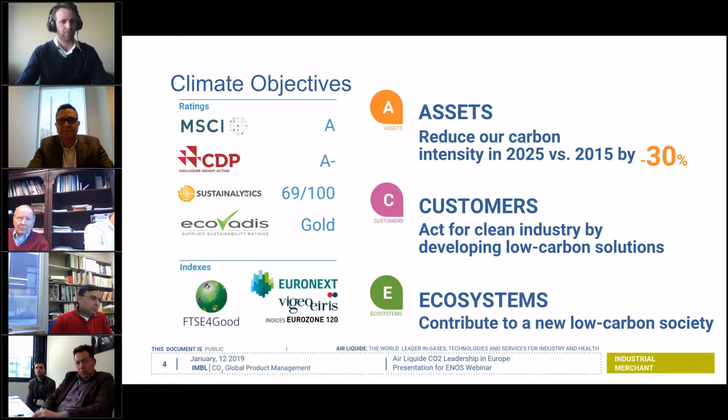One such example is in Port Jérôme in France, where we use our patented Cryocap technology to produce 300 tons of CO2 per day. This is a byproduct which comes from an SMR or a hydrogen plant. And this way we try to decarbonize our own production.

I thought it's very important to touch a little bit on this topic before I start getting into some of the other solutions, because I personally believe that due to change in regulations and policies, in less than 10 years from now, it will be an important topic of interest in a forum like this. Therefore, to stay ahead of laws, regulation and policy makers, and to contribute positively in reducing carbon footprint from our operations, we spend approximately 100 million euro per year to reduce the carbon emissions from our

I don't know how these slides got up and down.

Okay, so if you see, there are a number of emitters of CO2, and there are some high concentration CO2 sources coming from byproducts, and there are some lower concentration. The high concentration CO2 emitters are the ones producing fertilizers, bioethanol, ethanol, or even CO2 wells, where the CO2 concentration is more in the range of 98 to 99%. And then we have other sources like hydrogen SMRs, which have a concentration up to about 40%. The last ones would be the flue gases coming from pulp and paper, coal power plants, IGCC power plants, steel production, and so on. So basically, there are three kinds of sources.

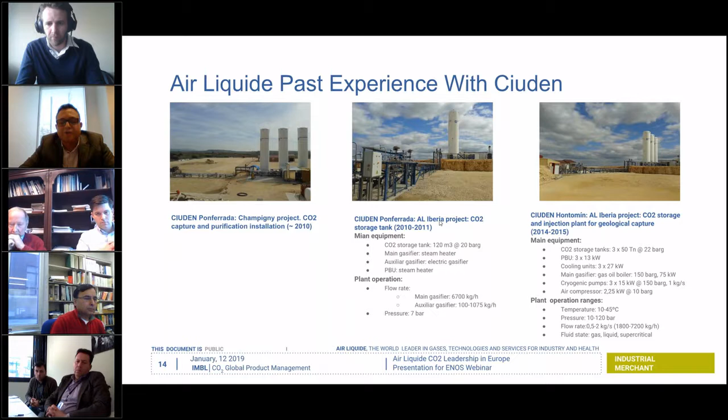And finally, the pipeline was designed to install tracers to detect CO2 flow and connected bottles to other gases for detection of various parameters which were required to monitor the flow, pressure, and temperature remotely. So with this, I come to the end of my presentation.

Okay, thank you, Puneet. I see I have one question from the attendees. If you have other questions, it's a good time to ask. So the question from Vitladik is, do you also use any natural geological CO2 sources?

In the sourcing mix, there is a dependence on natural sources, which is the CO2 which comes from the well, and in the industrial language we call it CO2 coming out from below the earth. Yes, it is there, and if we go back to the presentation and see the sourcing mix, there is about 12% of CO2 which is coming from natural wells. This is for CO2 all across Europe throughout the industry.

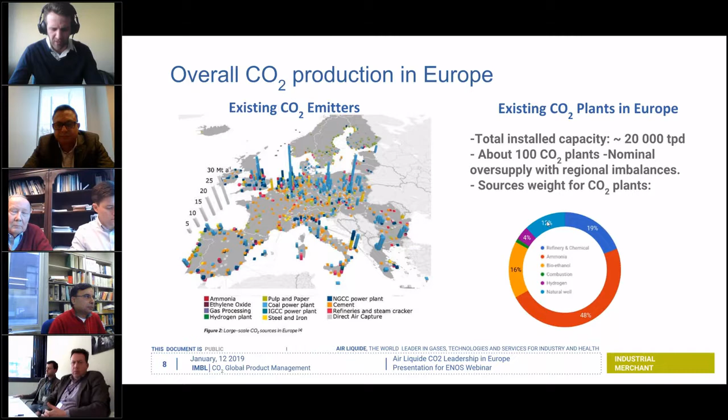Okay, I see. I just wonder, I want to go back to your slide on the cost structure. Just to be clear, you mentioned that the key for supply to CCS projects could be leveraging seasonality impacts. So that means you're kind of recommending that it's better to inject in winter, as I understand.

I mean, this was one of the suggestions I wanted to make: during peak summers, the capacities are always providing the molecule to the customers which need it the most. And if CCS activities can be planned in advance, there could be excess molecule available to inject into the CCS plants or projects.

So if you remember, with Air Liquide itself, we have a production capacity of 1.6 million tons per year, out of which 1 million tons is what is delivered. So the difference of 600,000 tons is basically due to the seasonality impact. And this molecule could be available if the activities are planned a little bit in advance.

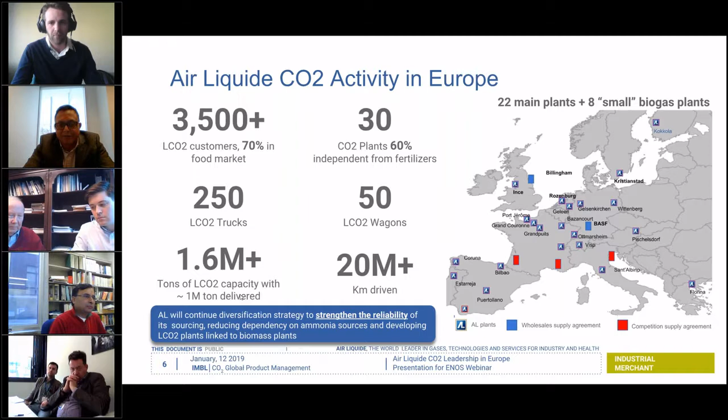Okay, so we have two more questions from the attendees. The first one from Thomas Berly is, what is the price of highly pure CO2, say for food and beverage, in dollar per ton?

I think it's quite relative, and the price throughout Europe would depend on a number of factors. It is basically a microeconomics case most of the times. If you have more supply than demand, the prices are low, and if there is more demand than supply, the prices tend to go up. It's not a hard and fast rule that we can say there is a price. There are other elements contributing to the cost, like the distribution cost. The further away you are from the production plant, the cost is going to increase.

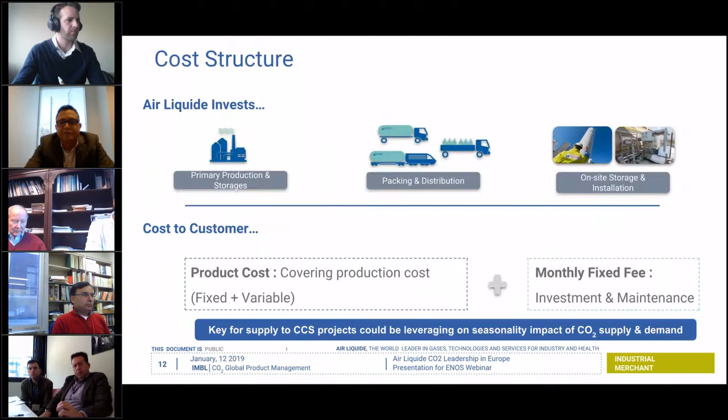Sure, thank you. And the other question from Timur de la Haye is, does Air Liquide supply biogenic CO2? Yes, if you see the set of plants which I showed you and the recent investments we have made. What can be considered biogenic CO2 or bio CO2? Any CO2 coming out of non-chemical activity, for example biomethane or bioethanol, where you use energy crops or corn as a feedstock. They all can be considered a short carbon cycle, where you produce CO2 from anaerobic digestion, basically from agricultural waste most of the times.

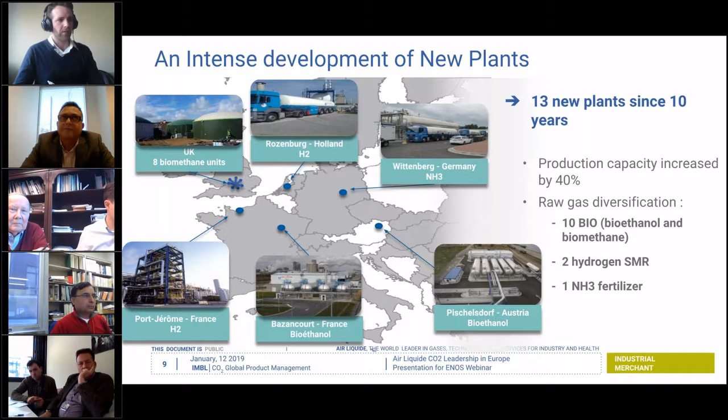Okay, I have a last question before we go to the next speaker. How do you trace the CO2 source to identify the source that may be out of spec? Sorry, can you repeat again? So how do you trace the CO2 source to identify the source that may be out of spec?

So this goes back a little bit upstream, to the raw gas source. Before putting the purification and liquefaction process in place, or during capturing, or even before capturing the CO2, we analyze the source for the kind of contaminations it would have and make sure the process upstream of the byproduct is in place, because this is very important. We need to understand what contaminations would come with the raw gas and what contamination could pass through to the end product.

And as I said, it is important, as the final product is CO2 which gets in close contact with the food we eat and gets dissolved in the products we drink. So it's important to make sure that at the first stage, when we select the raw gas source, it follows the required parameters to bring the final product to food and beverage grade. I hope that answers the question.

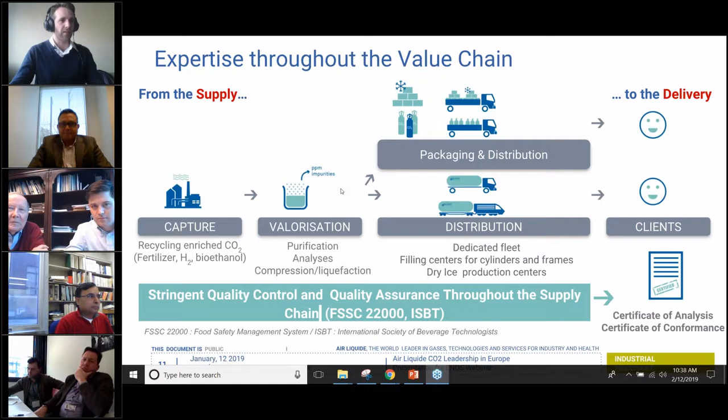Anyway, thank you. I think we need to go to the next speaker. So thank you again, Puneet. I will now mute you. So we give the floor to Matt Wallace, and just give me a second so I can give you the screen. Okay. We can see the screen. Perfect. Shall we start? You can, yeah. All right. You can start. Thank you. Good morning.

Matt Wallace and I, Vello Kuuskraa, are pleased to take part in this very interesting webinar. We're going to talk mostly about CO2 supplies, how they're linked with enhanced oil recovery, and other features that have enabled the capture and storage of CO2 to take place in the U.S. I'm president of Advanced Resources International. Matt is a senior consultant with our company. We're providing this presentation with support from the U.S. Department of Energy, National Energy Technology Laboratory, where we're helping them conduct a number of projects in the U.S.

Just a few words about Advanced Resources International. We have over 40 years of experience with CO2 enhanced oil recovery, both in the US and overseas. And for the past dozen or more years, we have brought this experience to storing CO2 in saline aquifers as well as in oil fields. We have also operated a variety of field projects at Plant Daniel, a coal-fired power plant where the CO2 was trucked in.

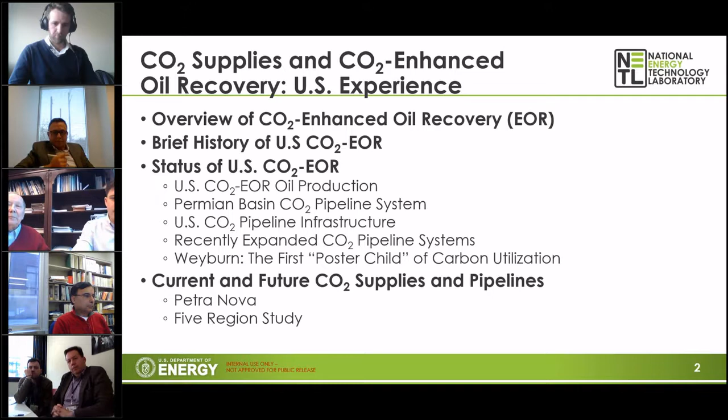Okay, just a couple words: the use and storage of CO2 in oil fields is relatively simple in concept, but it really requires sophisticated design, modeling, and monitoring. And an important point is that the CO2 that comes to the field ends up staying in the reservoir. The CO2 that gets produced is re-injected back into the reservoir, and at the end of the project, the wells are closed.

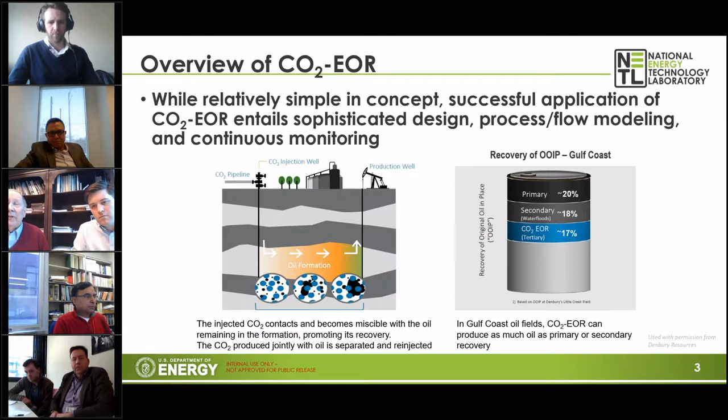And in some recent projects in the Gulf Coast, you find that CO2 enhanced oil recovery can provide about as much as initial primary or secondary recovery. And that should be reasonably consistent with its application elsewhere. Okay.

Just a brief history. It all started back in 1972 when CO2 was captured from natural gas processing plants in the southern part of West Texas, and then piped about 200 miles to the SACROC oil field. With that experience and the discovery of larger natural sources of CO2, major pipeline systems, and Matt will talk a little bit about those, began to bring CO2 to the large oil fields in the Permian Basin.

And then a third, I think, very important step in this linkage was the cooperation between US and Canada on capturing the CO2 from the Dakota gasification plant in North Dakota, transporting it 200 miles across the border to Canada, and using it and storing the CO2 in the Weyburn oil field. And I'll chat a little about that as well.

And then more recently is the expansion of CO2 EOR. Its capture from a variety of sources, natural as well as industrial, both along the Gulf Coast and in the Rockies. Okay.

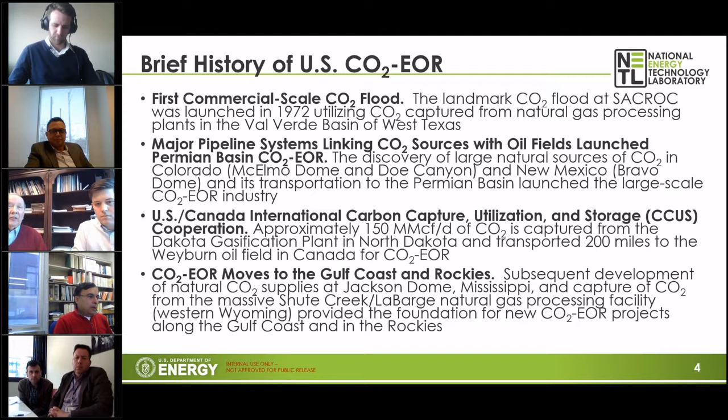I will just provide words here to bring everyone up to speed on where the industry stands today. First, a little bit about the CO2 EOR oil production side. We've really come a long way in the last 30 years or so from roughly 50,000 barrels a day in the late 80s to, as of 2014, around 300,000 barrels a day.

As you can tell from the graph, roughly 2/3 of that oil production is coming from the Permian Basin still. But we've had significant developments in the Gulf Coast and the Rocky Mountains, as well as the Mid-Continent region in Oklahoma, contributing some significant oil production to that total.

Today, in the last 4 years or so, we're at roughly 320,000 barrels a day. We've added a little bit to that total. Despite some oil price fluctuations, the industry's remained relatively steady and actually increased the total oil supply. And that's from roughly 135, 140 total projects in the US.

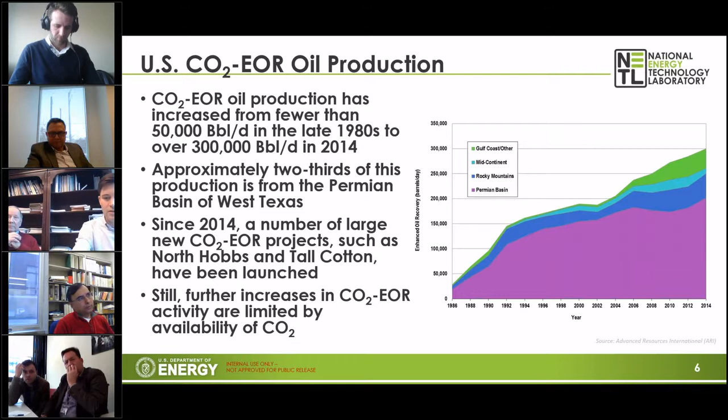Most significantly, though, I think it's important to note that CO2 EOR is really CO2 limited. There's a limited supply, and as soon as that supply increases, total EOR will increase along with it. We'll take a look at a few of the major regions now. As we mentioned, the Permian Basin of West Texas is really the heart of CO2 EOR in the US.

This is an overview of the CO2 pipeline system. You can see in the southern portion of the map, the Val Verde gas plants. They were the original sources of CO2 for EOR. They're still in use today, although at somewhat diminished capacity. Near their location, you see the Century gas plant, which is providing a significant amount of CO2 for EOR today.

And then in the northern regions are the natural sources, McElmo Dome, Doe Canyon, and Bravo Dome. They're providing about 30 million tons per year of CO2 for EOR. And they arrive in the middle of the Permian Basin at Denver City through the major CO2 pipelines.

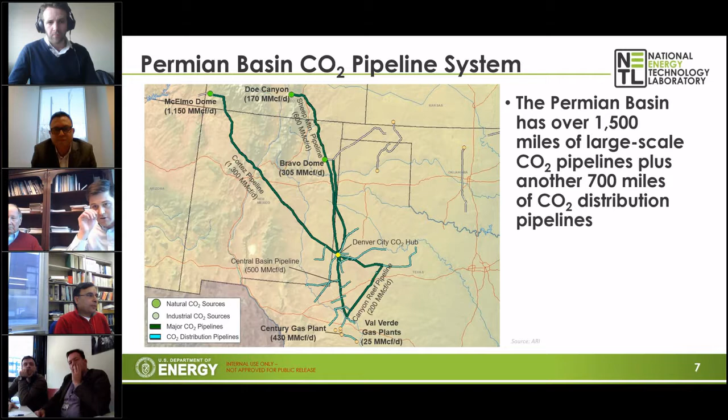The blue lines are the regional distribution systems that take that CO2 from the sources and deliver it to the fields. Overall, we have about 1,500 miles of pipe for large scale, and then about 700 miles of the distribution lines.

This is the current infrastructure map as it stands today, including the Gulf Coast of Louisiana and Mississippi, where Jackson Dome is our natural supply that supplies the Gulf Coast, and Wyoming, which is provided by industrial sources of CO2 to EOR. And then in North Dakota, we have the Great Plains Synfuel plant, which Vello will talk about in more detail, delivering CO2 to the Weyburn field.

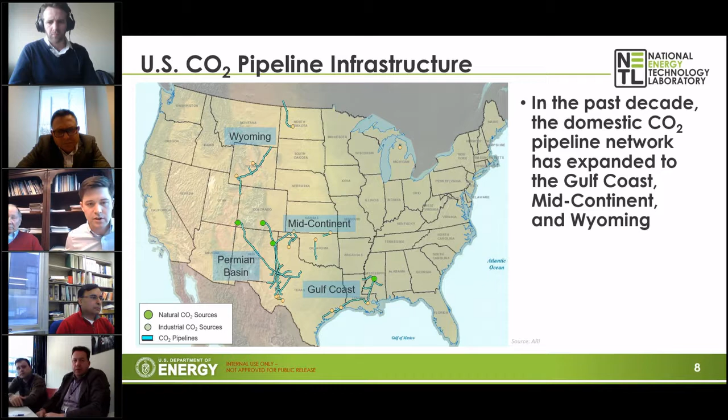And I believe another talk in this presentation in Michigan from the Antrim gas plant, delivering CO2 to the fields for Core Energy. All told, there are about 3,500 miles of CO2 transportation pipelines in the industry. So I'll just touch briefly on the other regions, the Gulf Coast and the Rocky Mountains. The Gulf Coast primarily uses natural CO2 from Jackson Dome, delivers that over 750 miles of CO2 pipeline. We also bring in modest amounts from industrial sources, including PCS nitrogen plant and Air Products plant. A new field at Petra Nova, we'll discuss that later on in the presentation as well.

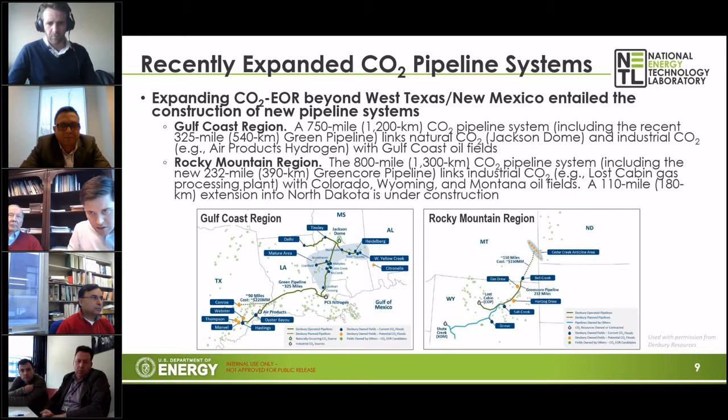As well as the Rocky Mountain region, which is primarily located in Wyoming. Industrial CO2 from the large Shute Creek gas plant, as well as the Lost Cabin plant, delivers CO2 to multiple EOR projects in Wyoming. There's also some planned CO2 delivery pipeline to fields in Montana and North Dakota that should be built within the next few years or so, depending on a few things.

So now Vello will discuss a little more about Weyburn. This is, I call it, the first poster child of carbon utilization, or CCUS. And it really demonstrated that you can have a full value chain working here. You have the CO2 source at Beulah, North Dakota. There's a 200-mile pipeline that crosses the border into Saskatchewan. And then the CO2 is used for enhanced oil recovery, but also it's the world's largest CO2 storage project at this point.

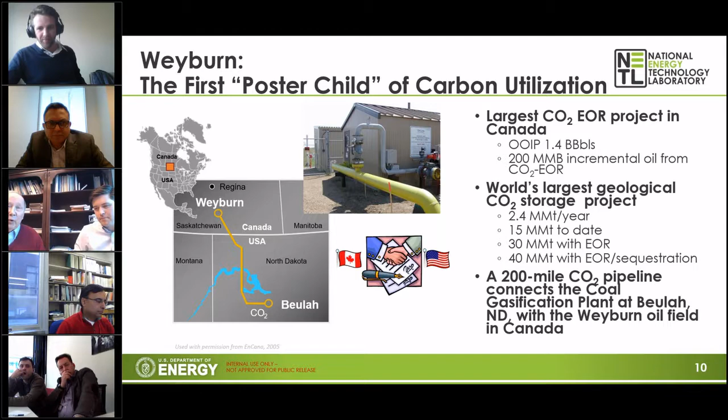We had the pleasure of working on this project for about 3 years to really help optimize it with the operator. And one of the important things was that both the province of Saskatchewan and the government of Canada provided certain incentives that encourage the additional storage of CO2 in the reservoir. And you can see that about 30 million tons will be stored with enhanced oil recovery, and another 10 million tons after that basically for storage itself. Okay.

Okay. And now just a bit of a look into the future. Where will we get the CO2 supplies and pipelines? I think you would have noticed that throughout this presentation, we've talked about the importance of pipelines and the fact that you can build large 500+ mile pipelines. If you look at the extended pipeline system in the Rockies, you're talking about 700 or 800 miles. And I think that will be a critical piece of the puzzle for linking these many sources to various storage sites as well as oil fields. Some of the past studies on this topic have been quite, I would say, conservative, pessimistic about the ability of pipelines to connect sources to sinks. And we'll come back to that a little more.

Today, about 40 million metric tons comes from natural sources used for enhanced oil recovery. However, these supplies are limited, and the future will depend on increasing volumes of CO2 coming from anthropogenic or industrial sources. And several first steps have already been taken. We capture CO2 from natural gas processing plants, ethanol, nitrogen, fertilizer, hydrogen plants, and they provide about 20 million metric tons a year. The most recent one, and Matt mentioned this, is Petra Nova, and this is a post-combustion CO2 capture project with a pipeline that takes it to an oil field.

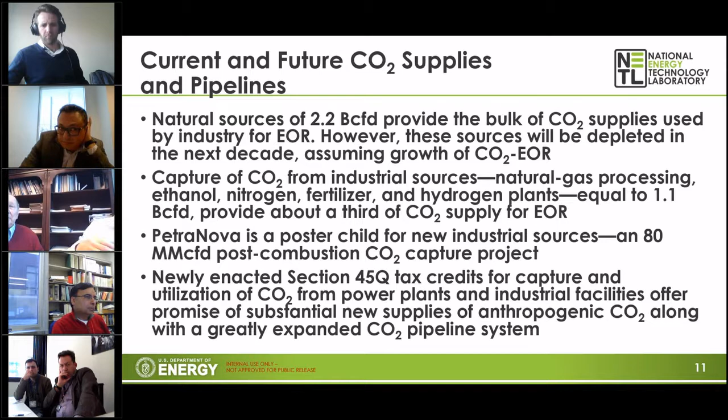And this is Petra Nova. It's, as I mentioned, the most recent project, and I guess is the U.S. poster child. It is a post-combustion capture plant on a coal-fired facility. They capture 80 MMcf of CO2 per day, and it is transported to an oil field about 80 miles away for use for enhanced oil recovery. And again, we've had the privilege of being able to work on this project.

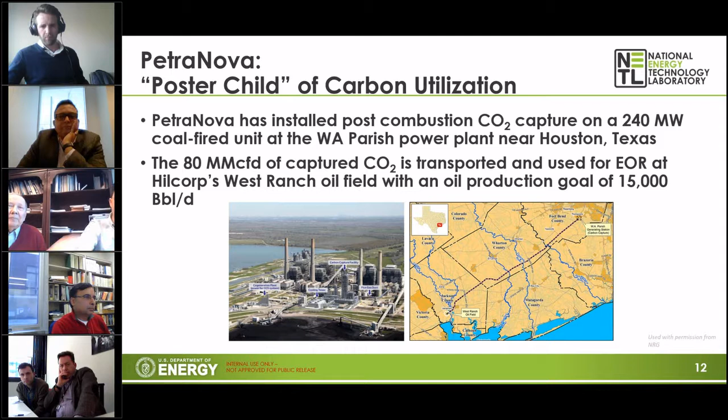And finally, as part of a larger study supported by a foundation as well as a carbon utilization research group, we looked at how the linkage of CO2 sources and their storage areas, primarily here for enhanced oil recovery, might play out in the future. And we designed a series of pipelines that would connect sources from the Gulf Coast, Texas, the mid-continent, with oil fields for CO2 storage as well as enhanced oil recovery.

And you can see 3 large long-distance CO2 pipelines, some as short as 200 miles, others as long as 1,000 miles. And then a variety of smaller scale gathering systems that would link sources of CO2 to oil fields. And scale is a very important part of it. It enables the transportation system to be quite cost effective.

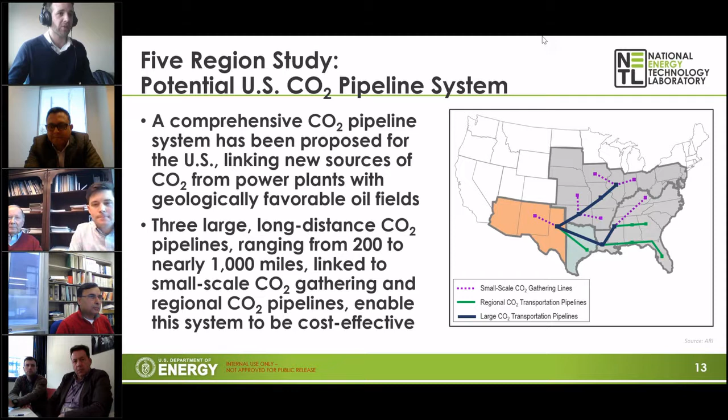I am Sanjay Mawalkar. I'm based in Columbus, Ohio, in the United States. I work for Battelle Memorial Institute. We are a research institute headquartered here in Columbus, Ohio. This is a variant of the same talk that I gave at the GHGT conference in Melbourne, Australia in October of 2018. It's a conference held every other year worldwide.

Vello and Matt Place gave a very good overview of how CO2 EOR works. Ours is a variant of a similar process whereby the CO2 acquired from a natural gas processing facility, the Antrim shale gas, is sequestered into the ground for the purposes of producing oil. The idea is to go from a primary to secondary to tertiary mechanism, and CO2 EOR is typically considered to be a tertiary mechanism.

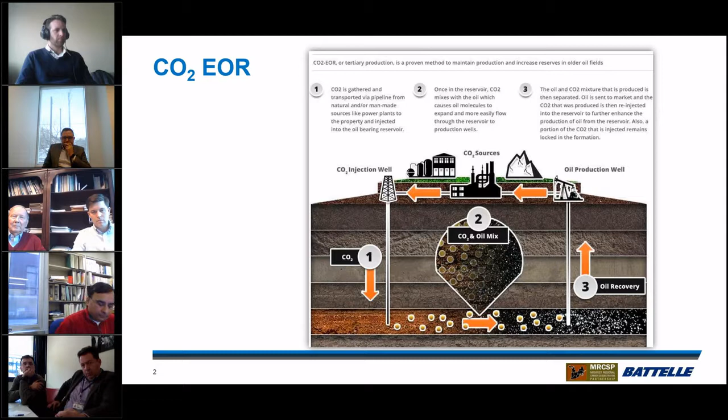What you're looking at is our project in the Michigan Basin, a CO2 EOR complex showing a lot of pipes and processing equipment. The silver-looking vertical stacks are the high-pressure separators that process the production fluids coming back. This complex is owned and operated by Core Energy, based in Otsego County in Michigan, United States. Core Energy began its EOR operations in 2003.

They also had conventional oil production assets that they're working with. Although the EOR that we're describing was taken over by Core Energy in 2003, some of the reefs that are part of this complex have been doing CO2 EOR since 1996. So it's quite old at this point.

The complex comprises 10 reefs, the Dover 36 production facility where the oil is separated from the recycled gas, and a network of gas and oil pipelines that transport CO2 to the reefs and then bring the production fluids back for processing.

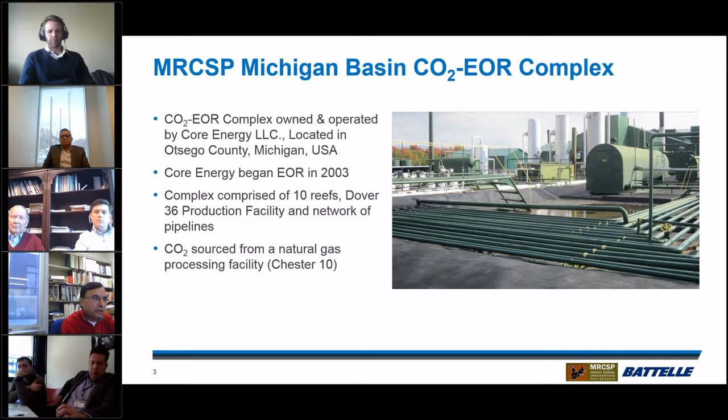As I said earlier, the CO2 is sourced from a natural gas processing facility called the Chester 10 facility. It's an Antrim shale gas play located about 10 miles south of this CO2 EOR complex owned by Core Energy. The CO2 is transported from that Antrim shale gas plant via a 6-inch carbon steel pipeline to the production facility first, and from there it's distributed across the various reefs currently operating.

In this presentation, we're talking about the Midwest Regional Carbon Sequestration Partnership, which is a program funded by the Department of Energy, the NETL specifically. This has been going on for the last 6 or 7 years. It has gone through multiple phases. We are currently in phase 3 of the monitoring program that's funded by NETL.

This particular presentation talks about the accounting methods and the CO2 EOR operations, whose primary objective was to safely store about 1 million tons of CO2 into the complex, which started in February of 2013. That's when we started monitoring the operations of CO2 EOR that is run by Core Energy. I'll be describing some technical details of how oil is processed and the recycled gas operations. Simple math, basically, that involves the mass balance of CO2.

Accounting of net CO2 stored at a single reef: if you apply the mass balance formulas, we can arrive at the net inventory of the CO2 that's left behind in a single reef. And the idea here is we're talking about associated storage, or some of you might know it as incidental storage. CO2 is definitely an asset for Core Energy, so they would like to reutilize all of the CO2 that they can produce back from a reef.

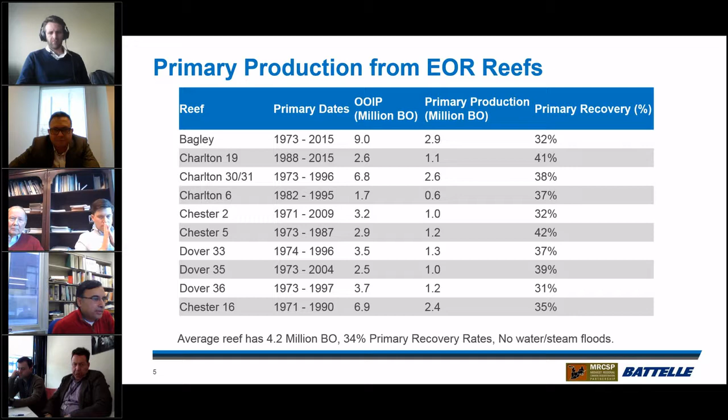Barring one or two reefs that have undergone some water or steam flood, the bulk of these reefs have not seen secondary means of production. So they're going directly from primary production to tertiary production via CO2 EOR. Some of these reefs are new. The Bagley Reef and the Chester 16 reefs are actually new reefs, but the other 8 reefs have been operating as active EOR reefs on a continuous basis since 1996. Some of them, of course, have been added recently. Typically, primary production, as I said earlier, is about 34%. So there's a fair amount of oil that still can be recovered back from these reefs.

In this reef complex that started operating in 1996 until now, all of the data that I'm going to present here is through June of 2018. We have new data, but we have not compiled it yet for presentation purposes. But the numbers are slightly off from that. Obviously, we have more CO2 sequestered in the ground.

The reef complex comprises a total of 10 reefs, of which 8 reefs are active EOR reefs. And amongst those reefs, Dover 33 and Charlton 6 are considered to be late stage. So they've gone through a significant amount of CO2 EOR operation. And at this point, there's not a whole lot of economical oil to be produced back from these reefs. But these reefs are still attached to the complex because they can be used for the purposes of storage operation.

That means when you have excess CO2 available, you can put away safely any of the CO2 into the reef and then produce it back when you need it elsewhere where you may be doing a new CO2 flood.

So as far as the new CO2 flood is concerned, currently at this point in time, Bagley Reef, which started operating in 2015, and Chester 16 Reef, which started operating in 2017, are considered to be new reefs. Bagley is particularly a large reef that has undergone a lot of CO2 flood, and the Chester 16 is relatively a smaller reef that's currently undergoing CO2 EOR flood, a new flood.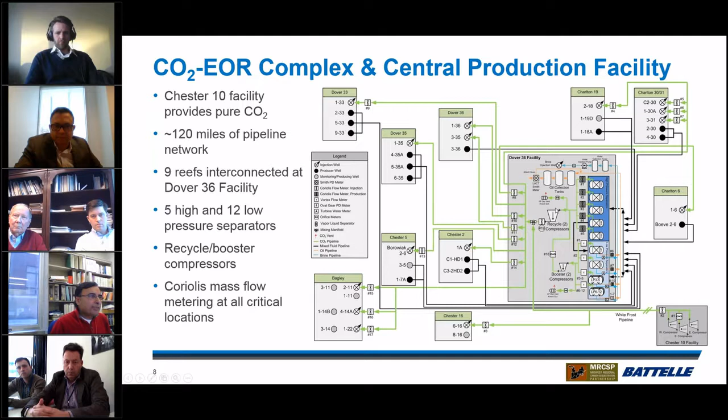Core Energy utilizes a TEG dehydration, which is the triethylene glycol dehydration system. So the CO2 that is delivered to Core Energy from the Antrim gas plant has some moisture in it that needs to be removed before it can be transported. So that CO2 is separated from the moisture using the triethylene glycol dehydration system. And that has a current capacity of about 30 MMCF per day, 30 million cubic feet of gas per day, which represents roughly about 1,000 metric tons of CO2 per day.

Core Energy has exclusive rights to capture all of the CO2 that's coming out of the amine gas processing plant. Currently, the capacity is about 28 MMCFD, which is about 1,000 metric tons per day. Saltwater disposal is also present at this particular facility. So any of the moisture that is captured, about 100 barrels of moisture captured from the gas stream that's coming in, is disposed at the site itself.

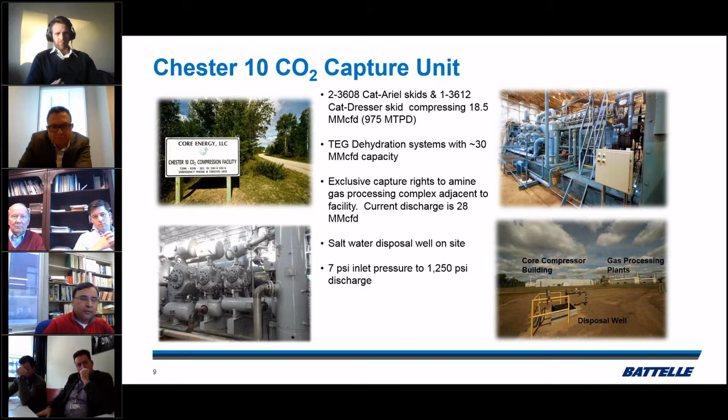The inlet pressure coming into Core Energy's compressor is about 7 psi, and by the time it leaves the facility, it's between 1250 and 1300 pounds per square inch, which is also the operating pressure of the compressors at the Dover 36 facility. So you can actually commingle the pure CO2 along with the recycled gas and send it back to the reef. Also, the configuration of the piping is such that you can allow a specific reef to obtain all of the pure CO2 that's coming from the Chester 10 facility, or it can have all of the recycled gas that's coming in, or it can have a combination of recycled gas along with pure CO2. So commingling is possible at this facility.

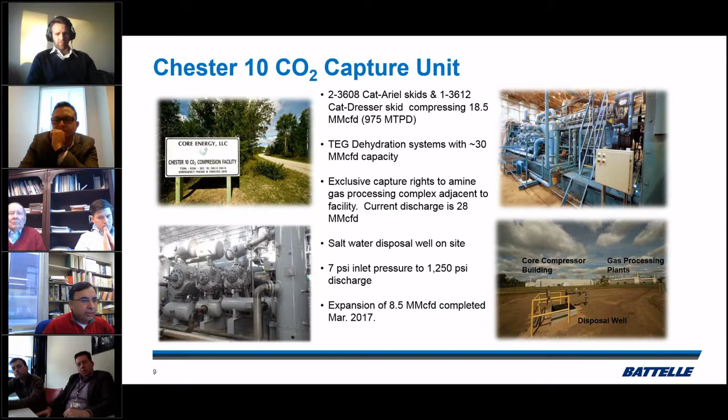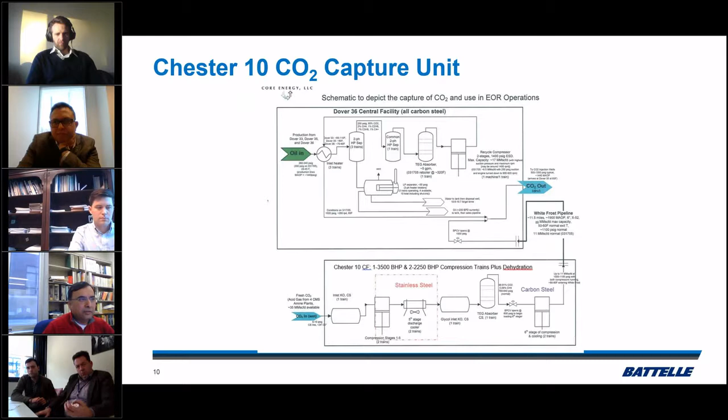As I said earlier, the mass balance accounting method includes a consistent basis of flow metering, which is measuring all of your accounting data via Coriolis flow meters. A Coriolis flow meter gives you its measurement on a mass basis rather than on a volume basis. There are some vortex type meters that are attached to the low pressure separator, but there is not a whole bunch of gas in that particular separator.

Those are measured on a volume basis and are converted back to a weight basis by using basically 19,000 cubic feet of gas equivalent to 1 metric ton. There is a minor amount of venting.

So basically when some of the compressors are forced into maintenance or issues or things like that, there may be cases where the reef keeps producing the gas and that gas is vented. But our accounting shows that the amount of gas that is vented is minute or insignificant compared to the amount of recycled gas or the amount of gas that is captured from the Chester 10 facility.

Also at the Chester 10 facility, if there is any downtime where the compressors have to undergo maintenance, we would not acquire any CO2 from the Antrim shale gas plant. And the Antrim shale gas plant in turn would vent that gas, but it would not be vented by Core Energy at its facility.

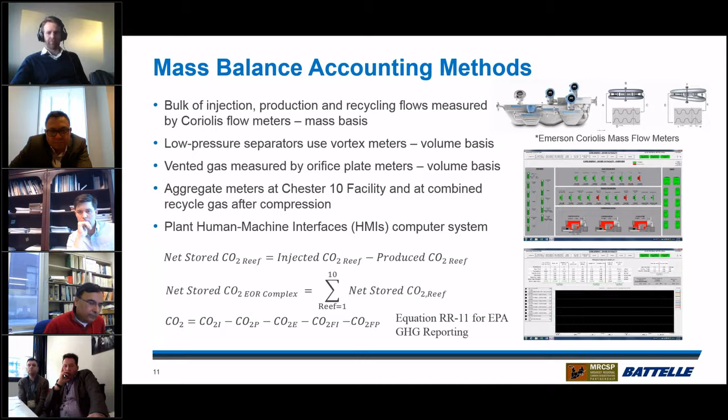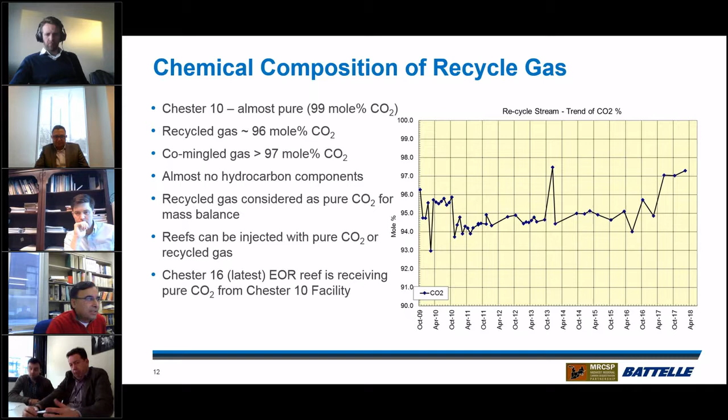So over the last 6 years or so that we have been monitoring this particular operation at Core Energy, 1.1 million metric tons of CO2 has been delivered by the Chester 10 facility.

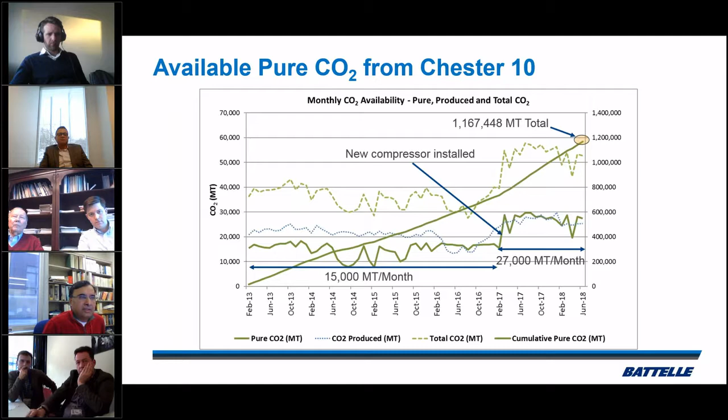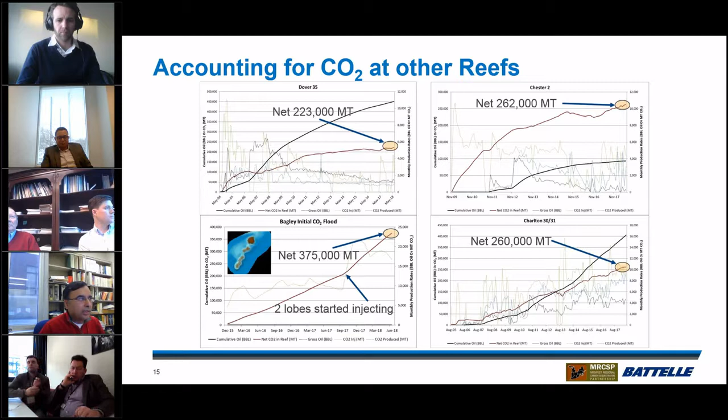We have hardly any venting losses in this particular facility, and the long-term accounting that we have done shows that the processing loss, in the process of compression and transporting all of this gas back to the reef, is insignificant. It's about 3.4% of the total amount of CO2 that has been delivered to this particular facility.

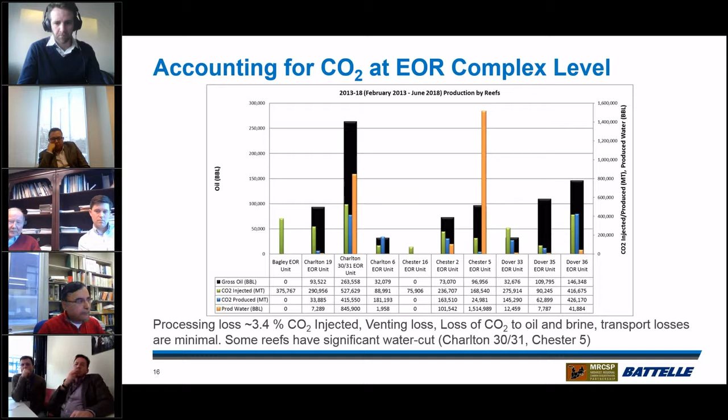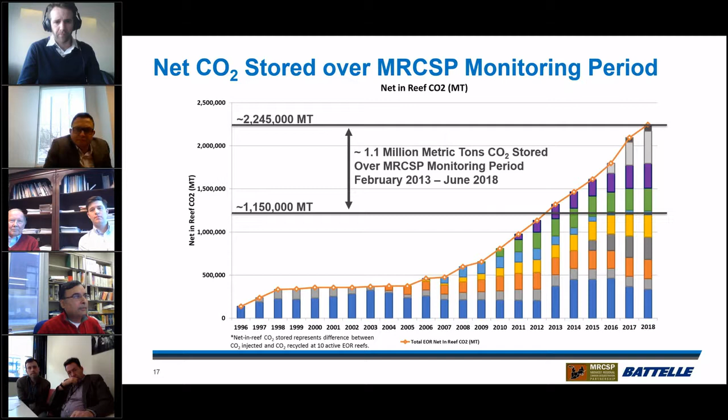This is of particular interest to Battelle because we are interested in long-term storage or associated storage with the CO2 EOR operations. So we track this very carefully. And these reefs are considered to be like closed tank systems. So if you extract a pore volume of oil and brine and gas out of the system, that pore volume becomes available for future storage. So if you were to bring each of these reefs back to its discovery pressure, how much CO2 can be safely stored in these particular reefs is a metric that we actually carry out in this dashboard.

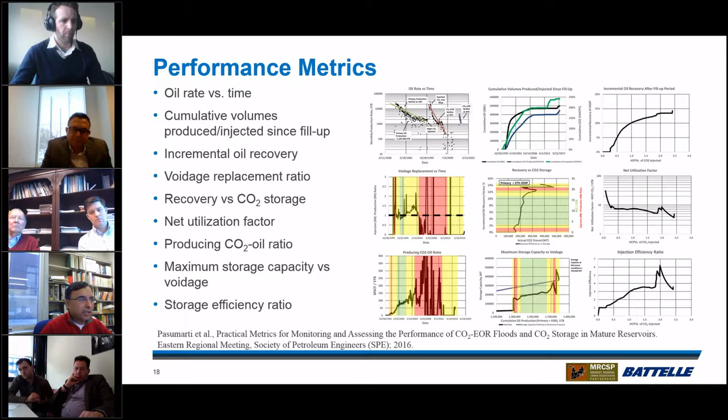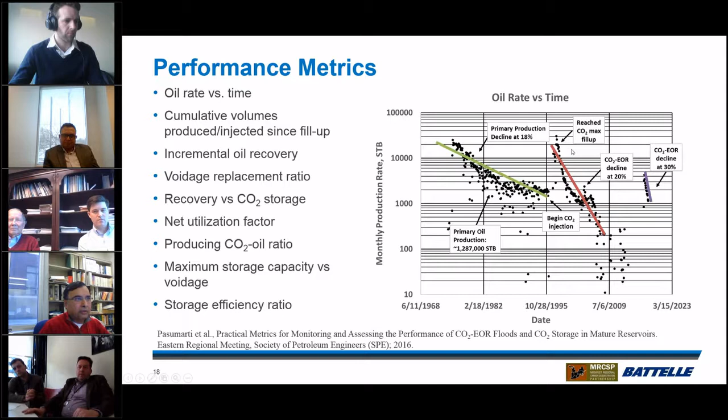So here is an example of an oil rate that is tracked during primary production of Dover 33 reef, which had a decline of about 18%, and then the CO2 EOR had a decline of roughly 20%, and in the second phase of the CO2 EOR, it was about 30%. So similarly, this slide is showing us that in Dover 33, you could leave behind without any problems about 360,000 metric tons all the way up to discovery pressure, which was roughly about 3,000 psi in this particular reef.

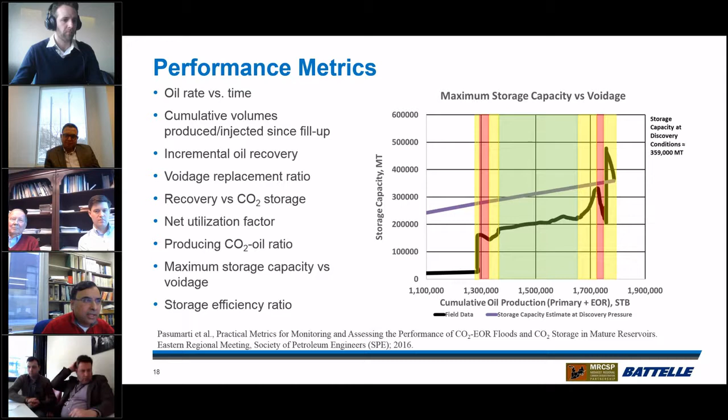The final key takeaways of CO2 accounting is that all of this data is really useful for GHG reporting purposes. Now, while the United States currently does not have a marketplace for trading in carbon, at least some of the companies, including Core Energy, are now beginning to report this data back to EPA. And those are called the MRV, or the Monitoring, Reporting, and Verification Plan, that have to be submitted formally to the government agencies. And the math around all of the accounting has to be reported on a consistent basis.

Year on year. And then this data is also very useful for performing life cycle assessment of the upstream gate-to-gate CO2 operation and downstream emission to figure out if the oil that you're producing from these reefs or CO2 EOR operation is truly green. That means the CO2 that you are acquiring from your industrial sources, does that incur a penalty in its acquisition and its processing and its storage and transport that is not as green as we thought initially?

But we have done analysis of our data, and it has shown that the oil that Core Energy is producing is quite green compared to other sources of oil. So that means Core Energy at this point is leaving behind significant quantity of CO2 in the ground, as opposed to CO2 that they would be consuming in the process of recycling and transportation.

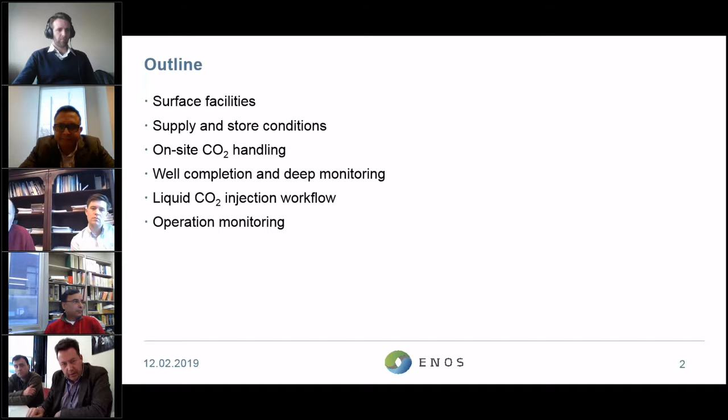So the floor is for Juan for the first 3 points in the outline: surface facilities, supply and store condition, and on-site CO2 handling. As you probably know, the Hontomín site is over an onshore underground reservoir where we carry out our main target, which is the CO2 injection in the deep saline aquifer, okay? Developing strategies to do it, trying to improve it day by day in terms of efficiency, but not forgetting the safety for the reservoir and for the area on the surface.

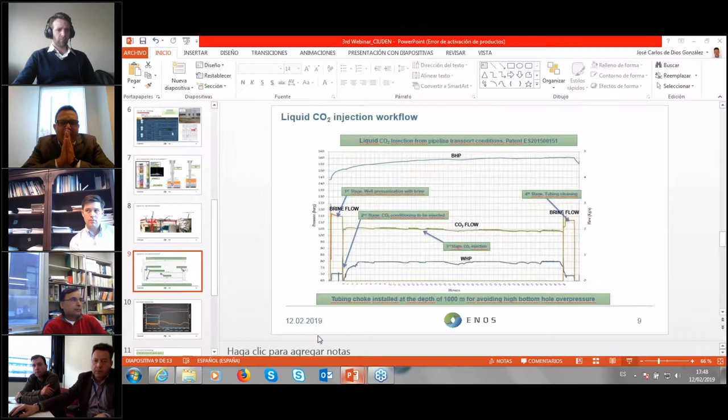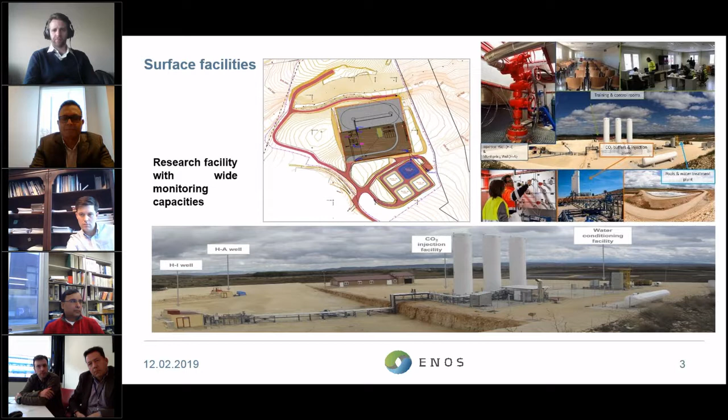The capabilities of the different parts of the pilot are different, okay, depending on the target of each. Starting with the water conditioning facility, you can see in the upper part the main properties of that. When we speak about water, I mean always brine. As you know, when we drill a well, the deeper the well, the higher the salinity of the water we can find. It's implicit with the depth.

So in all operations where we need to inject some type of brine, it's necessary that this brine has the same quantity of salt, the same salinity as the water from the reservoir, in order not to contaminate that water, and other issues. So talking about that facility, we have a pump to inject this type of fluid. It's possible to inject brine with pressures up to 125 bars, with flows up to 10 kilograms per second, always using the same artificial brine with a salinity around 25,000 ppm.

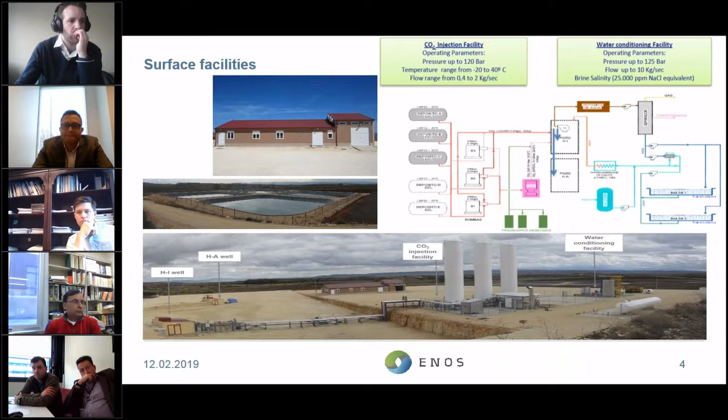As you can see in the picture, the CO2 stored in the tanks is supplied by the suppliers to the pilot using trucks. The trucks supply the CO2 in cryogenic conditions as well. So it's necessary to control that state when we discharge the trucks and when we refill the tanks. To do that, the common way in the industrial areas is using 2 different lines, one for liquid state and another for the gas state.

2 lines are necessary because it's necessary to control the pressure of both receptacles, tank from the truck and tank on site, discharging gas at the same time when we charge liquid. That is possible because each tank has 2 different systems to control the temperature and the pressure of the CO2 stored inside. One of them controls that when the temperature is increasing, a cooling system lets the CO2 decrease the temperature, so it's possible to control the cryogenic conditions.

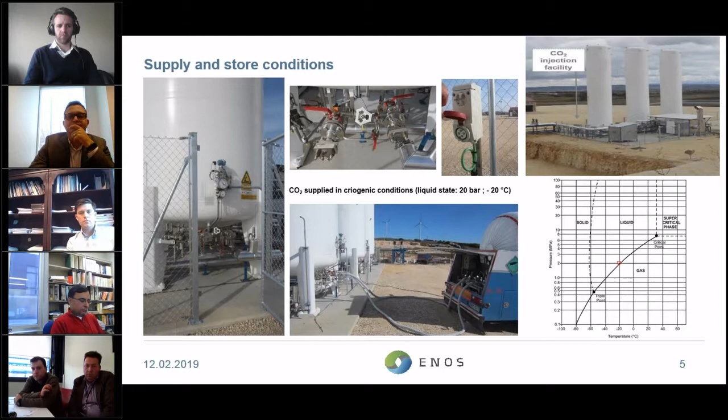But it's really common, if the pump of the truck, for example, does not work properly, the system tries to decrease the pressure. So it's possible to lose the cryogenic condition inside of the tank. That is maybe the most dangerous part of the operation.

Talking about the on-site CO2 handling, we have to pay attention to the condition of the CO2 when we are going to inject into the reservoir. As you know, it's not possible to inject CO2 at the same conditions that we store in the tanks, in cryogenic conditions. The main property, temperature, in cryogenic condition is minus 20 degrees. It's not possible to inject CO2 with that temperature because in a short time the most important consequence is that the shallow aquifers will freeze. So that is the main reason.

Another reason, having a look at the CO2 state diagram, is that it's necessary to avoid, as I said, other states that are not liquid state, gas or supercritical, for example. So to sum up, conditioning of the CO2 before the injection is necessary, in two different terms, in pressure and in temperature.

So as you can see in the picture on the left side of the slide, you can see our P&I of the pilot used in the SCADA to control and operate the installation. As you can see in the SCADA, the first part of the conditioning is to increase the pressure of the system from the cryogenic conditions at 20 bar to the pressure where we carry out the injection, as I said in the upper part, around 75 bars or higher.

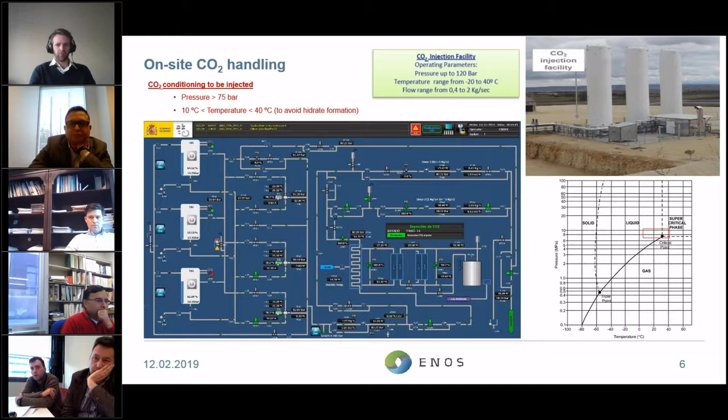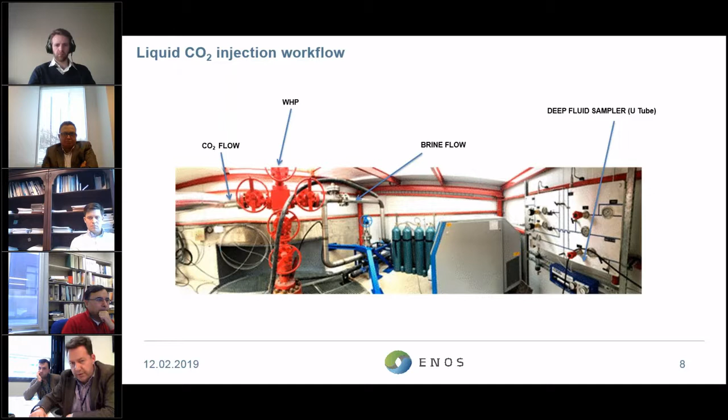This is the wellhead at the Christmas tree, and on the right side you can see the deep fluid sampler used to extract reservoir water samples in reservoir conditions. That means the samples are under the temperature and pressure of the reservoir, close to 140 bars and 45 degrees centigrade.

Okay, this is the liquid CO2 injection workflow. As Juan explained, 4 stages we use in this workflow, with alternative injection of brine and CO2. You can see on the left side of this graph the brine flow for well pressurization. It means we have to reach the value of 75, 80 bar. This is a set point.

It's a critical and crucial set point established to inject the CO2 in dense phase. That means in liquid phase or supercritical phase, very close to the liquid phase, as explained in the thermodynamic diagram of CO2.

Afterwards, the second stage of this workflow is the CO2 conditioning prior to being injected. As explained by Juan, we need to pressurize the CO2 and as well increase the temperature, because the cryogenic conditions, minus 20 degrees centigrade and 20 bars, must be increased to the range between 10 and 40 degrees centigrade and above the 75 bar set point.

The third stage is the CO2 injection. Here, green line. The flow, in this case, 2 kilograms per second. As mentioned by Juan, we are injecting the CO2 using 2 pumps at the same time. That means we are coupling 2 pumps for CO2 injection.

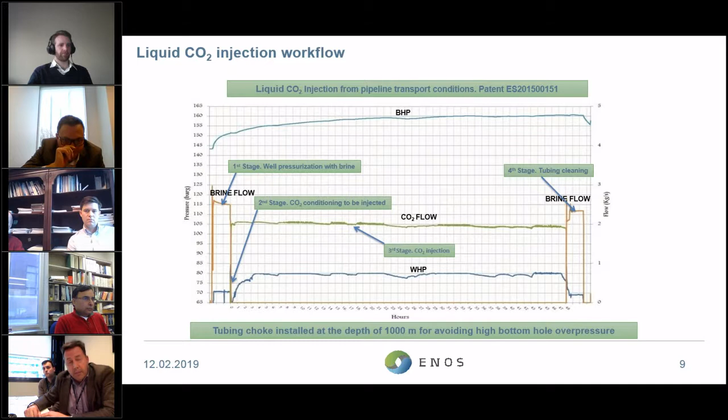The reason that the wellhead pressure is not transferred at all to the bottom hole is that we have installed a tubing choke. That means a pressure drop valve at a depth of 1,000 meters to avoid high overpressure at the bottom hole. And this high overpressure could fracture the reservoir and the seal, putting at risk the reservoir seal.

You can see here, in this graph, the CO2 injection test conducted in the ENOS project during 24 hours, in this case establishing a set point of 80 bars. This is the control mode used in this test. That means that we maintain during the test always the same value of the pressure, 80. So at the top, you can see the bottom hole pressure evolution during the injection and during the follow-up period.

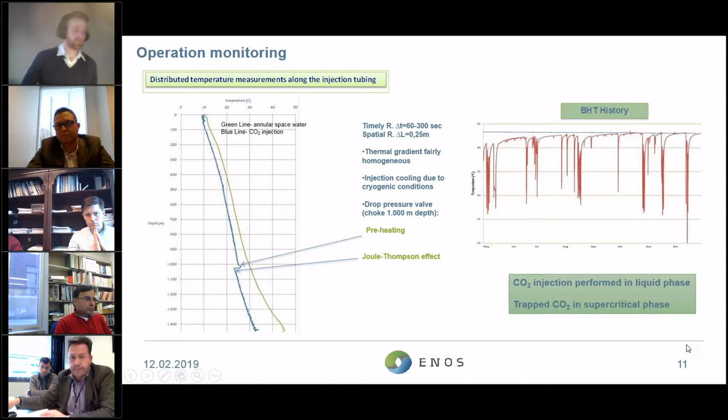The injection was performed in liquid phase, and the trapped CO2 is in supercritical phase. So that is all from our side.

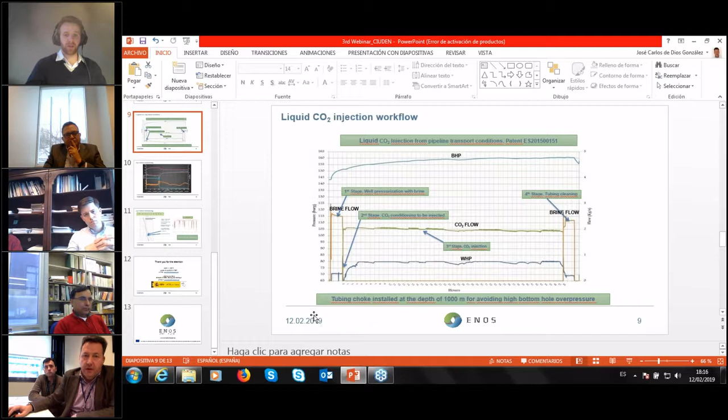So the first question is regarding the numbers on the on-site CO2 handling slide. What is the CO2 pressure and temperature at the injection wellhead, and what is the estimated one at the bottom hole? So I think you kind of answered that on your last slide. You can see here. Sorry, here.

Okay. As Juan explained during the presentation, we try to be as effective as possible, so the liquid CO2 injected on site is probably the most effective operation. To do that, it's needed that the wellhead pressure is always equal to or higher than 75 bars. This is the set point. And this operation was conducted in pressure control mode. That means that the CO2 injection pumps are working to maintain this value from 75 to 80. You can see here more or less the transient period and the permanent period.

Okay, so 80 bars at the wellhead. But at the bottom, you can see that we have reached 160 when the baseline is 140. That means that we have increased the overpressure at the bottom by 20 bars. And this is due to a pressure drop valve that was installed in the tubing. So the final pressure is 160 and the final temperature is more or less, you can see here, 35 degrees centigrade. That means that the conditions to store CO2 at the reservoir are in supercritical phase, but the injection along the tubing is in liquid phase.